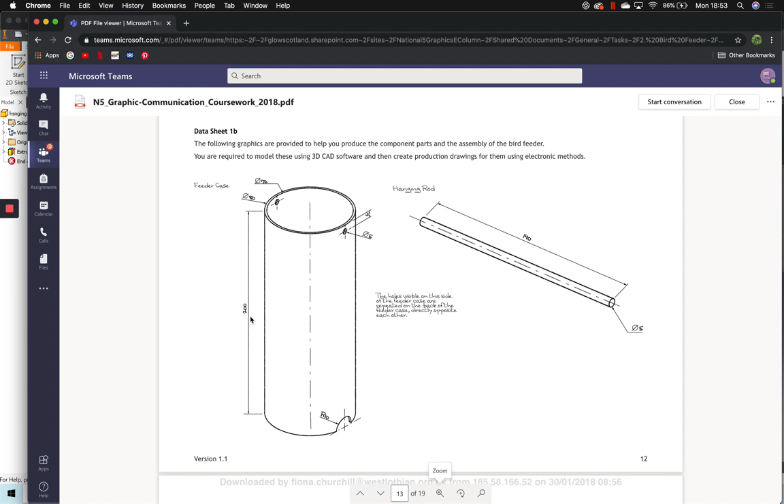This is video 2 of 4 for the National 5 bird feeder. In the first video I showed you how to set up an Inventor page and how to make the hanging rod. In this video we are going to look at the feeder case and how to set up the drawing so that we can make it to the size provided in the task.

So in Inventor we want to go to File and New, and again we want to make sure that it's set to metric and that it says millimetres for the part.

Now, just like before, we've got our tree down the side and all of our commands at the top. So we want to click Start a 2D sketch, and this time we are going to select the XZ plane.

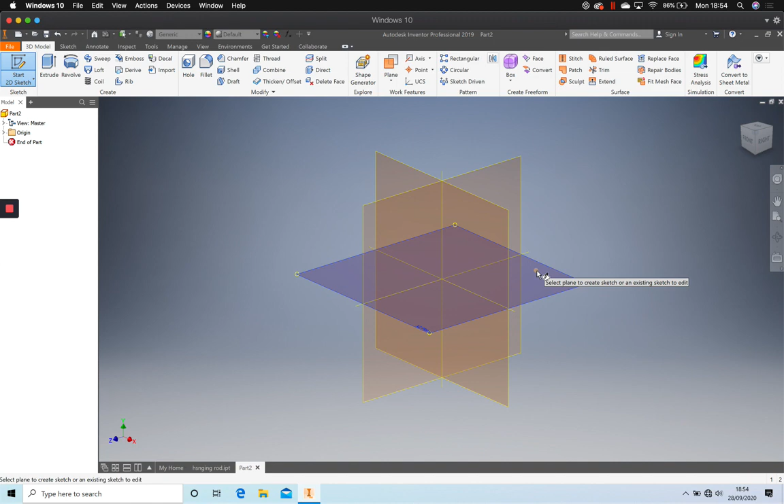Now, if we look at the drawings given to us on the data sheet, we can see that the object is round, and again, similar to the hanging rod, it stays the same width all the way down. So we can assume that, just like the hanging rod, it would be extruded the whole way down.

So looking at the drawings, we're trying to get the outside of the circle. We can see here that the 80, the diameter of 80, is the biggest circle at the top here. So what we're going to do is go to Inventor, click our circle and then our middle point, and we're going to make that 80.

Now, the biggest mistake that people make with Inventor is that they try and do too much at once. So instead of trying to get this hollow at the very start, we're going to just make it a solid object and then build on top of it so that we can then hollow it the way through.

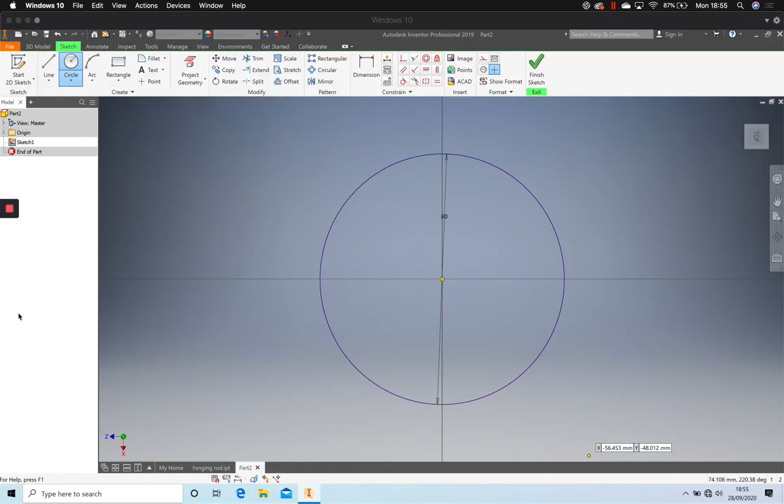So you can see here in the drawing that our 80 circle top to bottom is 200. So we will finish our sketch and click Extrude, and you can see here it's set to 10, so we're going to make that 200, and we have our tube at 200 here.

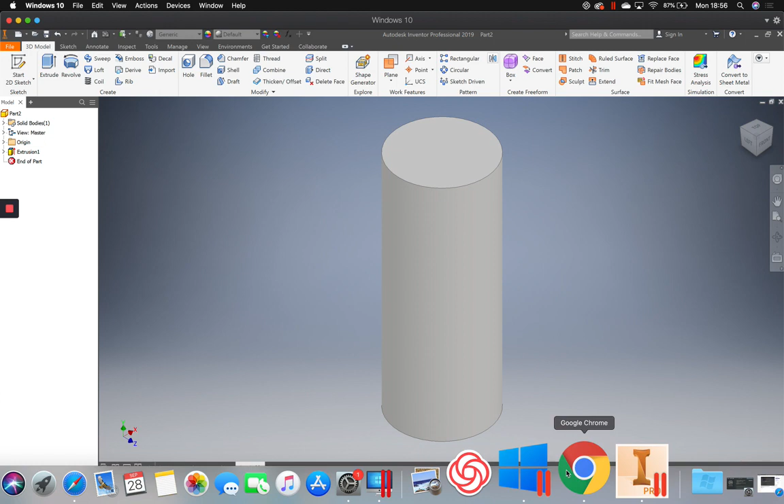Now when it comes to the thickness of the walls, so how far the hollowness is going to be, you will see that here it says that the inner circle, so the bit that we're going to hollow out, is 76.

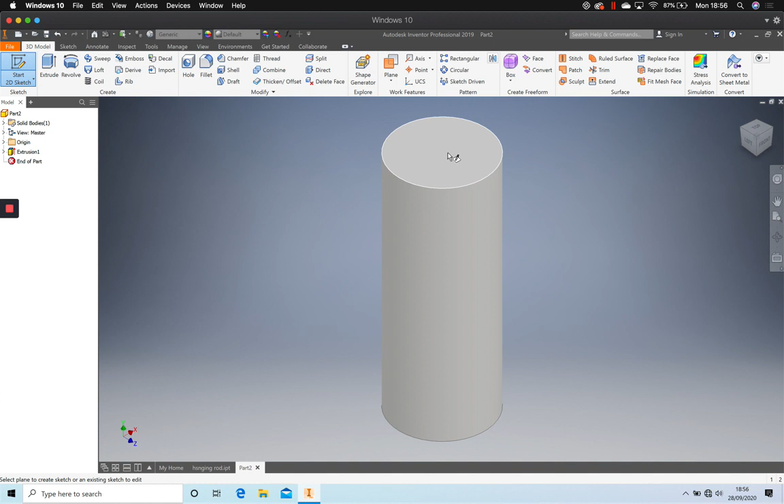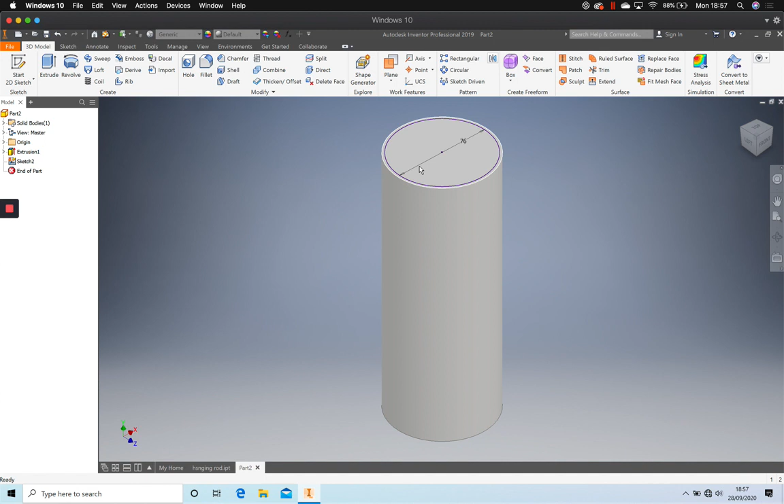So back in Inventor, we're going to click 2D sketch and then the top of our circle, and on the top we are going to draw another circle and make that 76. Once done, finish sketch again. So you can see here that we have our original shape and then we have our 76 circle at the top. So we're going to click Extrude again.

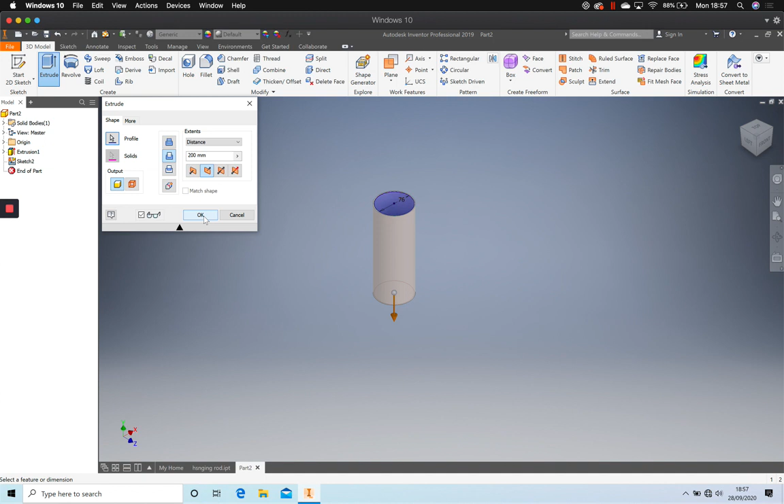However, instead of it building on top of it, we're going to change the direction, making it direction 2, which is just this orange square here. And you can see that it's automatically changed this to cut, so instead of extrude, we're going to extrude subtract. So we're going to press OK, and you can see that we now have our hollow tube.

So if we look back at the drawing, we can see here that we've got holes at either side and then a semicircle at the front here.

However, reading at the side, it says that the holes visible on this side of the feeder are repeated on the back of the feeder, directly opposite each other. So the hole here, there's a hole directly opposite, and what that's saying is that the semicircle here, there's also a semicircle on the back of it.

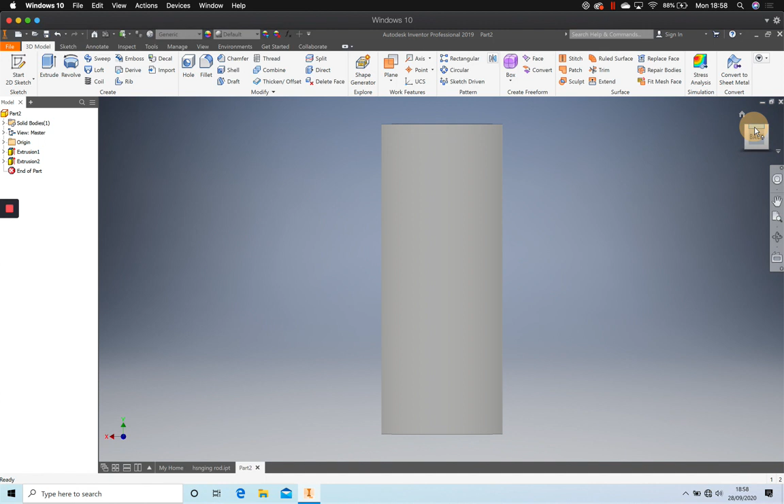Because our object is round, we can't just start a sketch on this surface. So we're going to have to create a flat surface in order for us to sketch onto it, and this is where planes come in. Down at the left hand side of your model tree, there's a little folder called Origin. We'll expand that folder, and it gives us lots of different options of either axes or planes.

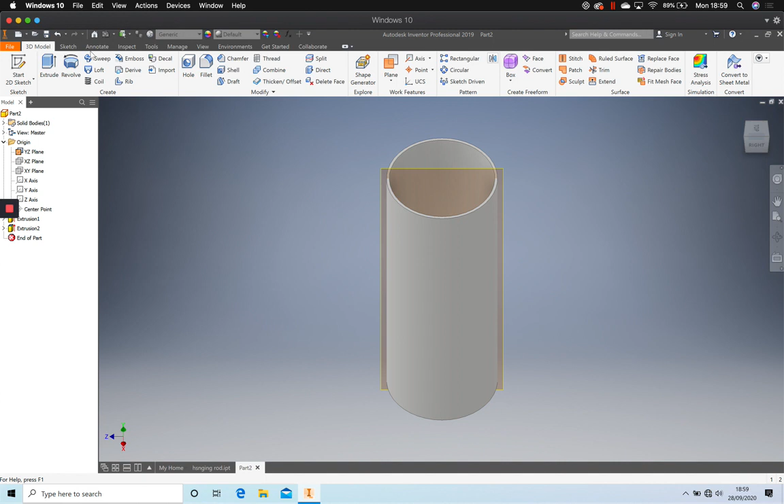I'm then going to click Start a 2D sketch, and click the outside of the plane, which means that I'm starting to sketch onto the plane. Now if I press F7 on my keyboard, it halves the object so that it makes it a bit simpler to see what we're drawing on.

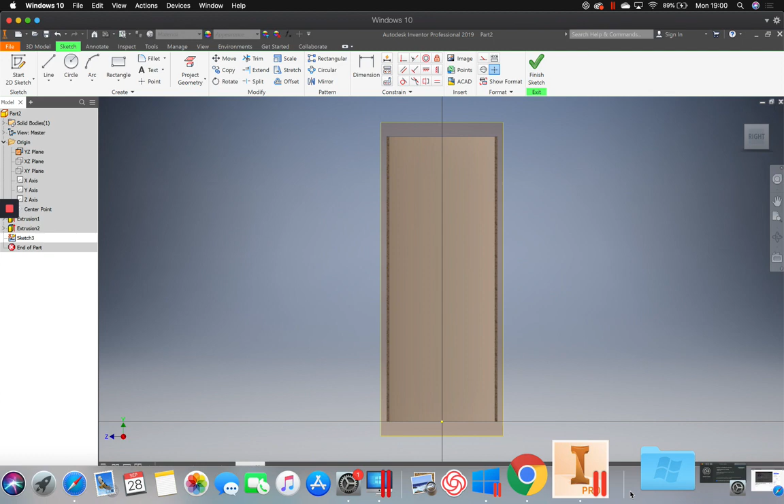Going back to the drawing, we can see here that the circle is 5 in diameter, and that it's 6 millimeters from the very top down. So what I'm going to do is select any point on this line, and make a circle at 5.

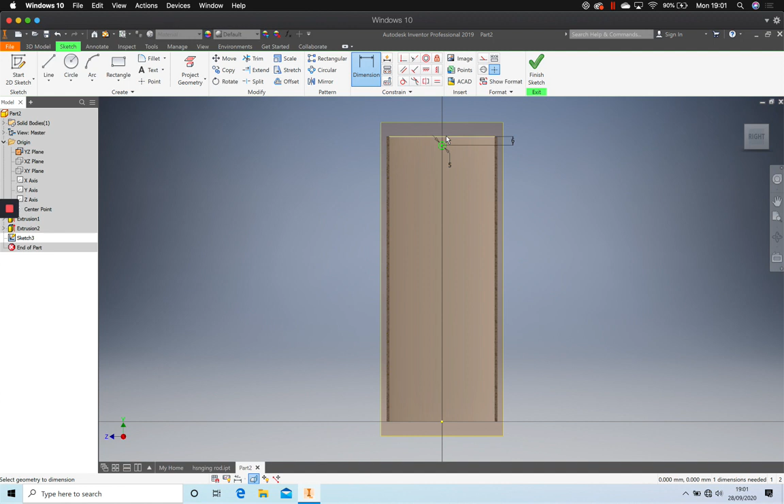I'm then going to use my dimension tool to select the centre of the circle and the top line, bring that out, click, and make that 6. You can see that automatically moves the circle to where we want it to be. So it doesn't matter where you've put the circle as long as it's on this centre line - you just make the circle at 5, click dimension, make sure it's from the centre of the circle to that top line, and make that 6.

On the drawing, we also have this semicircle here. Now, in terms of drawings, what they like to do is kind of trick you, and you can see here they've given you a radius, whereas Inventor uses diameters. So a radius of 10 would be a diameter of 20 because we double it.

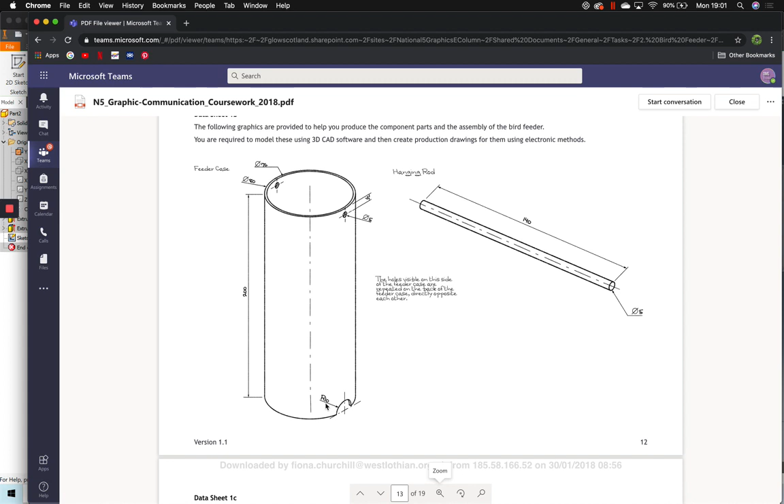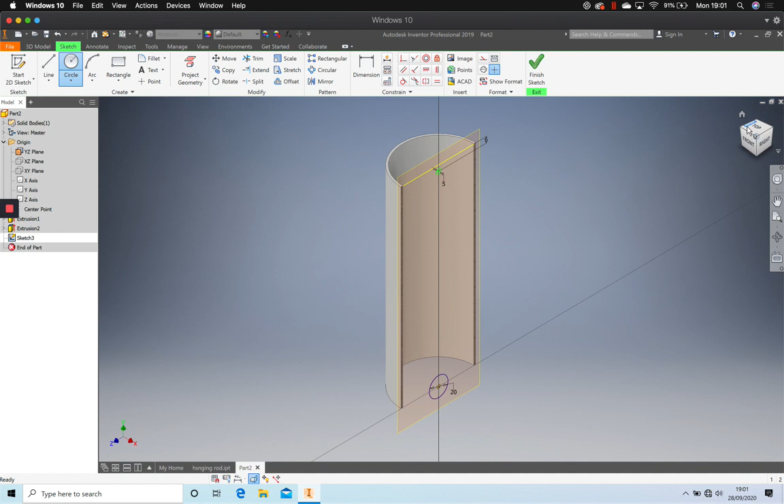So with our circle, right at the bottom point, we're going to make that 20 and press enter. You can see that I've now got on my middle plane my little circle at 5, which is 6 from the top, and right at the very bottom, the bottom line in the middle, I've got a circle at 20. So just like before, we're going to finish the sketch.

Like what we did with the circle at the top, we're going to click extrude, and select one of my circles and my semicircle, and you can see here it's looking a little bit silly. Obviously it's not set to cut yet, so it's given you solid lines, and also it's only sticking out in the one direction, so we've got a couple of things we need to change.

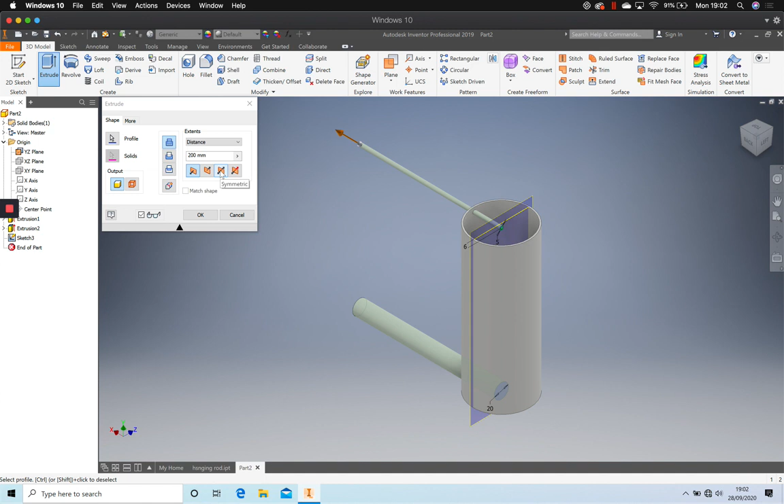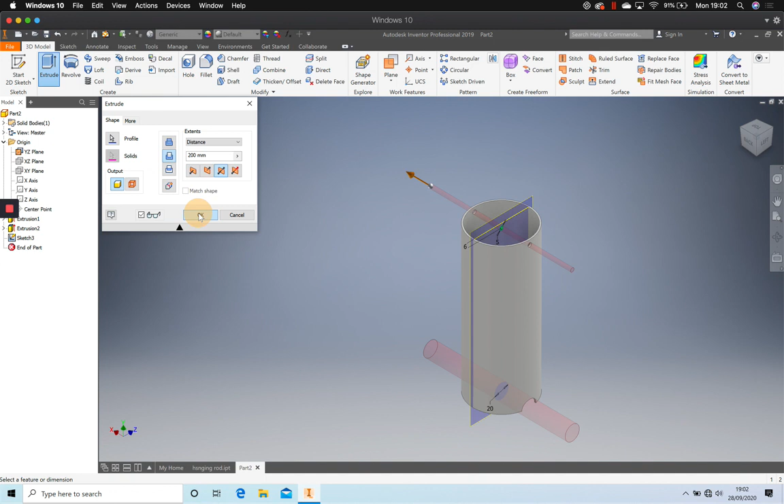The first thing we need to do is change the direction. So instead of direction 2, which would just put it the opposite way, we're going to click symmetric, which means that it goes in both directions. Once we've done that, we're going to change it to cut, so extrude subtract, and you can see here it's now cutting out the shape rather than the solid. I'm going to press OK, and there we have our casing with the hole at the top and the semicircle at the bottom.

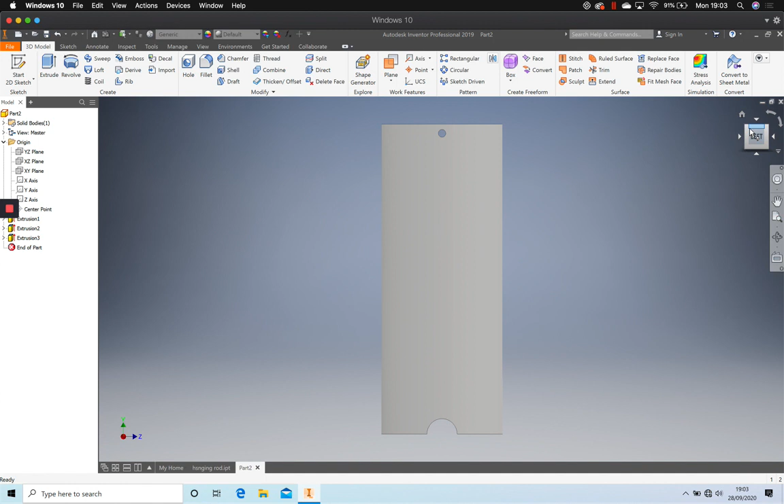Now before we save, what we want to do is right click the plane and turn off visibility, just so that it looks a little bit nicer and that the plane won't be shown when we start assembling it. So like before with the hanging rod, we're going to go to File, Save As, find your OneDrive, and call it like casing or whatever you would like to name it so that you remember it. And there we have our case.